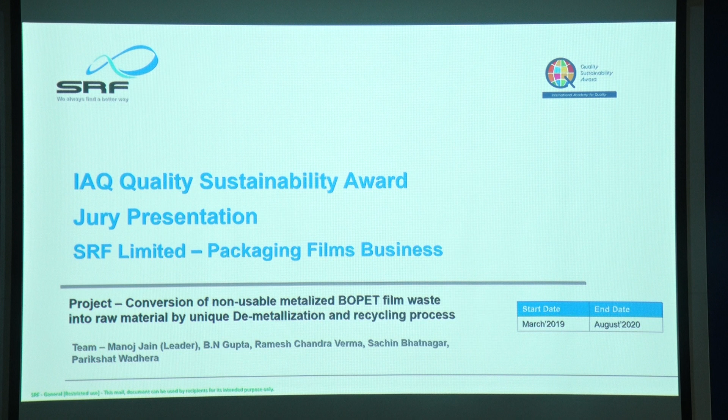Hello everyone, we are from SRF Limited, an Indian multinational having many businesses, and we are from the packaging films business of SRF. Our project is conversion of non-usable metallized polyester film waste into raw material by a unique demetallization and recycling process. My name is Manoj, and with me are my friends and colleagues BN, Sachin, Ramesh and Parikshat.

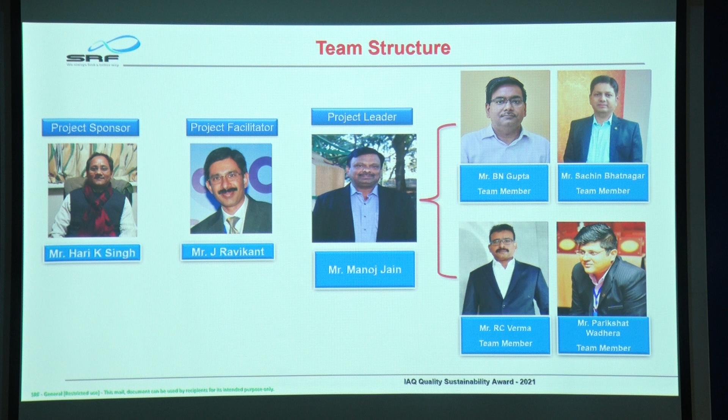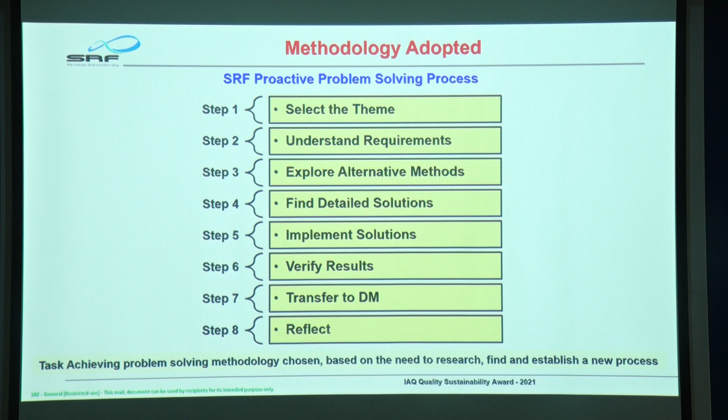So where is this need coming from? This need is coming from FMCGs or brand owners looking at sustainable partners, SRF wanting to be a responsible corporate supplier to them, and there was a global industry transition happening towards sustainability. There were foundations like the Ellen MacArthur Foundation, where a lot of brand owners took an oath of working towards sustainability within a given time frame, which led us to take a policy goal in 2019 about enhanced effort towards sustainability, under which 5 themes were identified.

While there were other teams who took up projects like single family structures, product portfolio shifting from packaging to industrial, we as a team thought of taking 3R as a challenge, under which we chose conversion of non-usable metallized polyester film waste into recyclable and reusable polymer.

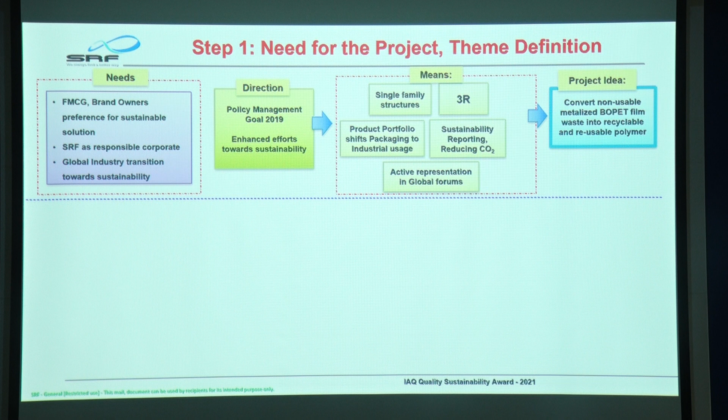So if you see the life cycle of the metallized film, we are producing 2 types of films. One is the transparent films or the bare films, which constitute about 76% of total production, and the waste of this particular stream goes back into the same process and is continuously being used. There is another stream which is metallized films, which corresponds to 24% of the total production.

Metallized films are used for improving the barrier properties of the food or non-food package, while the A grade goes to the customer. There's a 2.5% wastage generated during the process, corresponding to 535 tons per annum. This finds use in paper plate or rope manufacturing, and finally finds end of life cycle in the landfill.

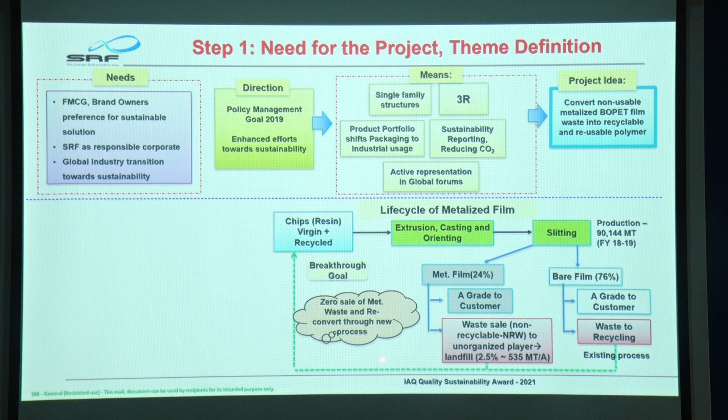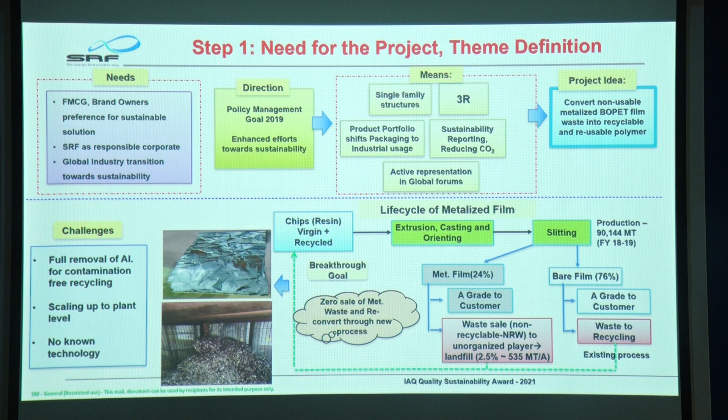So we thought that we want to eliminate the sale of this 535 tons of wastage. These are the 2 types of waste that we produce: one is in sheet form, the other is in trim form. The challenge in front of us was how do we achieve complete removal of aluminium from this film, and how do we scale it up, as there was no known technology available.

So what we wanted was a non-hazardous, easy to use process for complete demetallization of this metallized film waste. Fortunately, since we already had the transparent film waste with us, identifying target Q was not a challenge for us.

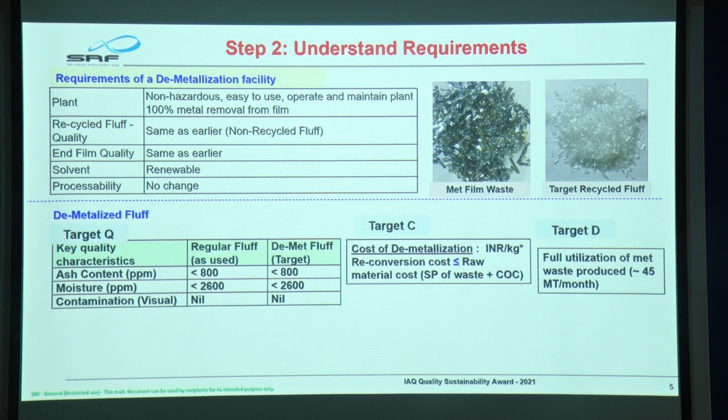So we identified target Q in terms of ash content, moisture and contamination, similar to the transparent fluff. Target C: we thought the cost of conversion should not make this fluff more costly than the raw material cost, so that is our target C. Target D: since 535 tons per annum corresponds to 45 tons per month, that is our target D.

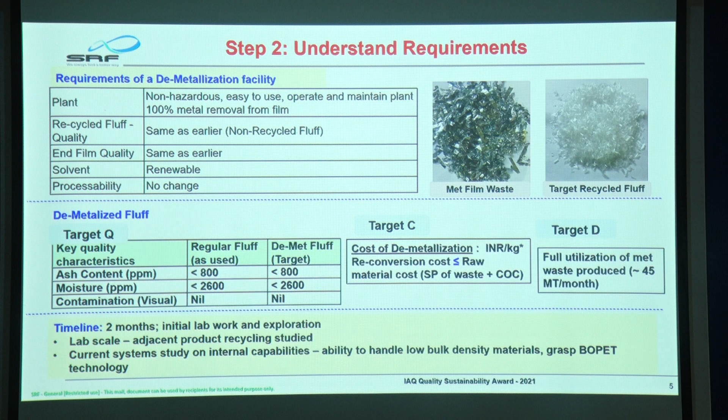With respect to timelines, since this was an exploratory type of project, it required lab work. Using adjacencies of BOPET film knowledge and internal capabilities, we wanted to understand how we could extrapolate this to handle low bulk density materials. So using PDPC, we took trials with various solvents in various concentrations at various temperatures, with agitation and without agitation, and finally ended up finding an alkaline solution which gave us complete demetallization.

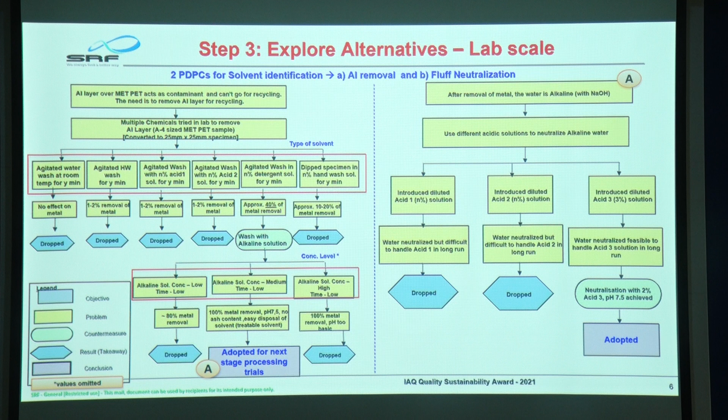The residual water was again a challenge for us to neutralize. So we extended this PDPC to find a best fit acid which could completely neutralize this residual water, to be used safer in the effluent treatment plant, and finally back into the process.

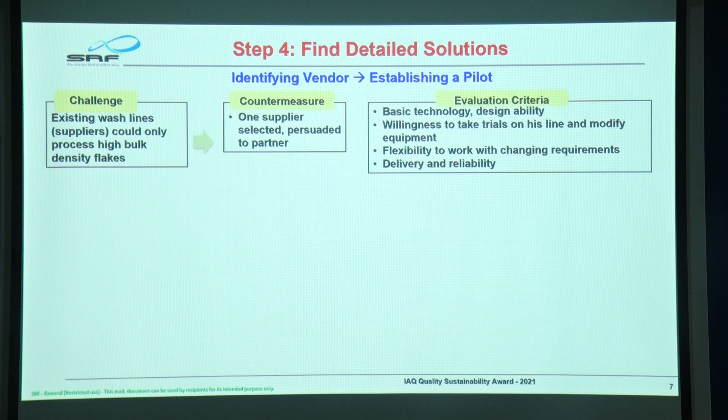The next big challenge in front of us was how do we scale it up. We know, by virtue of being in the polyester industry, that there are PET bottle crush wash lines available. So we chose 1 supplier based on our evaluation criteria and persuaded them to partner with us. One of them agreed to build a 10 kg per hour prototype for us, and we sent our waste to his site. We took trials as is, without any modification to the PET bottle crush wash line.

What we found was there were metal traces, meaning there was incomplete demetallization. The fluff was not moving forward as a continuous process, and there was very high moisture, which led us to do a design FMEA where we had to increase the surface area for complete demetallization. We needed to change the agitator and the conveyor for fluff forward movement, and we had to increase the dryer length to achieve moisture-free fluff.

Once this fluff was achieved, we brought it back to SRF, since the ultimate objective was to use it as raw material. We brought it back into the main extrusion line, injected it back, and took 4 sequential trials. While the processability was good in terms of film breaks, there was slight grayishness in the color which needed further redressal while we order this on a full-fledged basis.

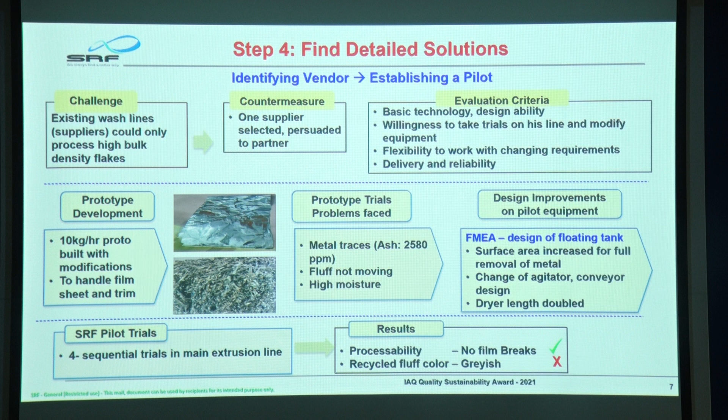We ordered this complete equipment from this particular vendor, which took about 6 to 8 months. Our job, meanwhile, was to find the best fit layout. We did many iterations.

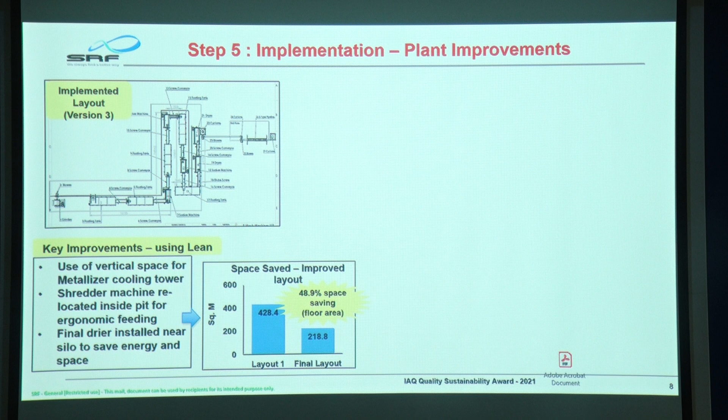We used vertical space by shifting some cooling towers vertically up, and the shredder needed to be located very close to where we were storing the waste. We finally ended up saving about 50% of the space that the vendor proposed to us.

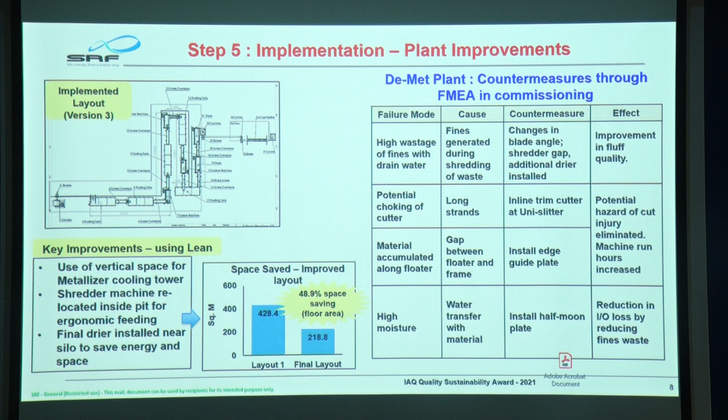When the equipment reached us, we carried out a process FMEA since we envisaged certain problems during the pilot scale. We envisaged high fines in the drain water, choking of the cutter, material accumulation along the floater, and high moisture. The countermeasures were identified and implemented, and we finally commissioned this plant in July 2020.

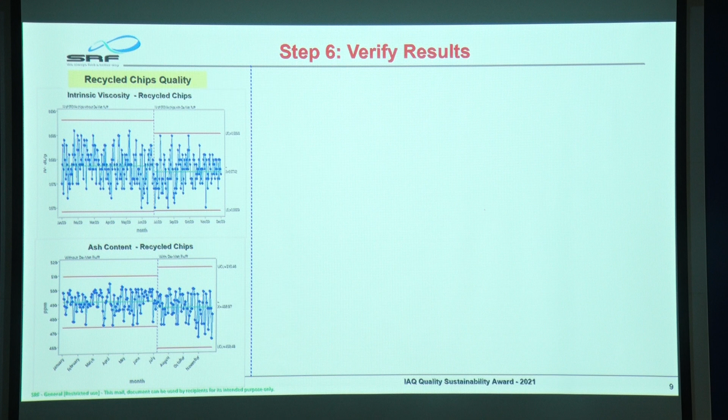Time for verification now. We verified both the recycled chips quality and the film quality. For recycled chips quality, the intrinsic viscosity is pretty stable, well within range, and also the ash content. Tensile strength is the most critical characteristic of the films.

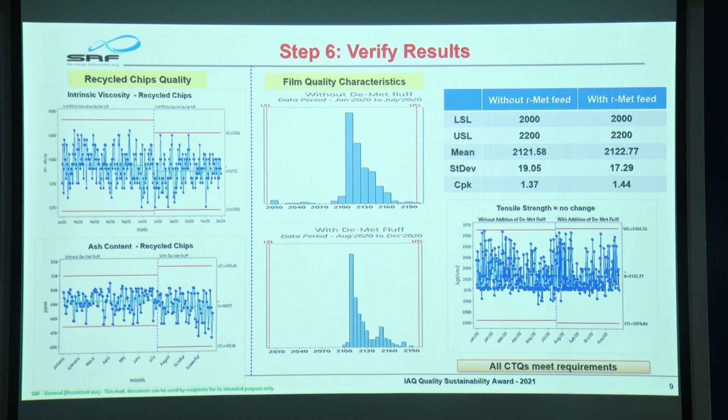We verified this. The process here again is very stable with a CPK of 1.44. So all CTQs are meeting the requirements.

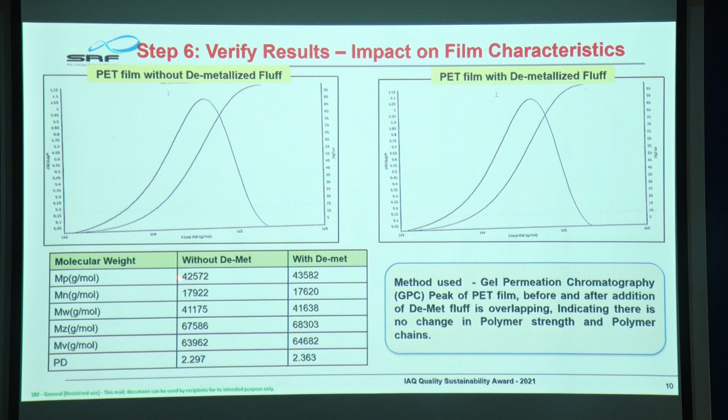We thought we must do a GPC analysis of this, so we checked the molecular weight before and after, which was found well within range. We sent this sample for food compliance certification outside. Before and after, the film was found food compliant.

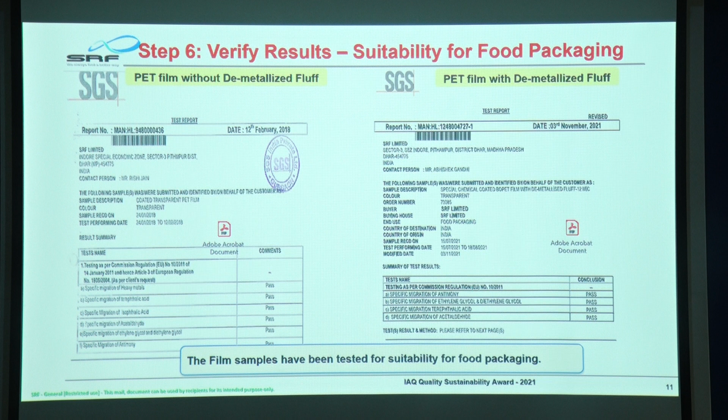Coming to verification of the larger goal, as we said initially that we don't want to sell this waste anymore, we are happy to share that from October 2020 onwards, we are not selling this waste outside, except for these 2-3 months of March and April where there was COVID and we had to shut down the plant for want of labor. We are happy that we have completely eliminated the sale of this non-recyclable waste.

Coming to the IO ratio improvement, we have been able to improve the IO ratio by 61.5% by virtue of recycling this waste back into the polymer stream, and in addition we have been able to save on the carbon footprint to the extent of about 920 tons per annum.

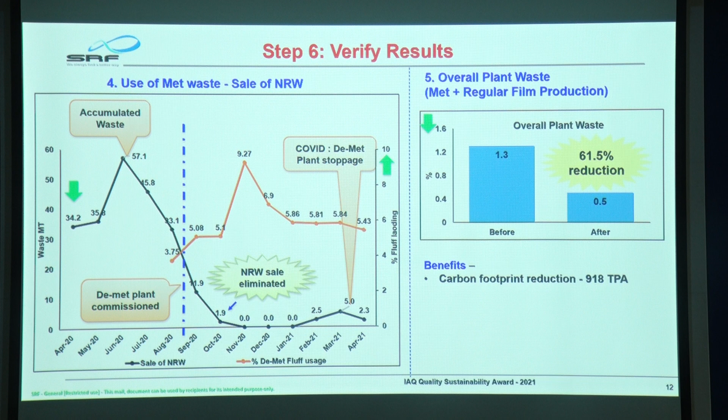This whole project included 63 different activities which we were able to complete more or less within the given time frame. This required 25 odd people at the project stage, and for routine operations we need about 10 people to run this plant.

This whole project cost about $330,000, and although we said that the cost should not be more than the raw material cost, we are very happy to share that this project has actually given us an ROI of 70%.

Since this was a new project, this required establishment of new standards, which we did, including SOPs, WIs, maintenance checklist, including the revision of the QCPC, since this whole fluff wanted re-injection into the main lines. So the mainline QCPC needed revision.

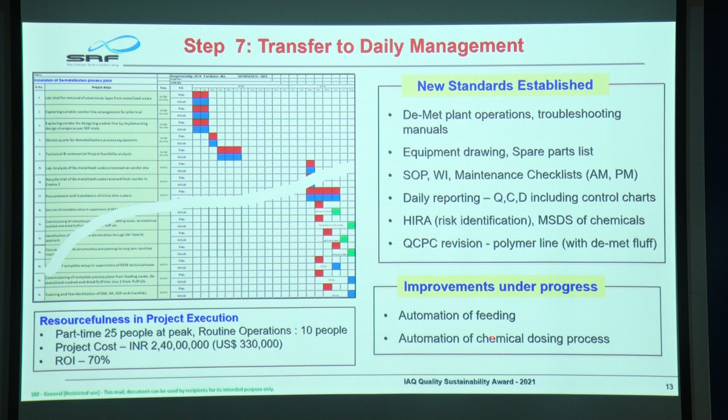There are some things still under process, like automation of feeding and chemical dosing, which we are doing.

Coming to the reflection, we feel that Goal 12 and Goal 9 are the best suited goals met during execution of this project. Goal 12, why? Because this is responsible consumption. As we said, we have actually been able to recycle 535 tons of waste back into the raw material stream. So that is responsible consumption for us.

Goal 9, industry innovation. This is quite an innovative project because no one has ever done it earlier. We are the first one to do this, and we are very happy to share that 2 of our competitors have already ordered this same line from the same vendor.

Since we have plants in Thailand, South Africa, and Hungary, there are horizontal deployment opportunities existing. We have already started executing this at the PFB Thailand plant, and going forward we'll be doing South Africa and Hungary. Whenever any customer or FMCG visits us, we proudly share our success story with them, and they feel proud that they are associated with SRF as a responsible and innovative partner.

We are happy that we have actually been able to improve or increase the end of life cycle of the polymer to support circular economy, which according to us is when a stream of waste goes back into the process for the same product - that is circular economy to us. We are happy that we have been able to achieve this, which has led to our capability development on our journey to sustainability.

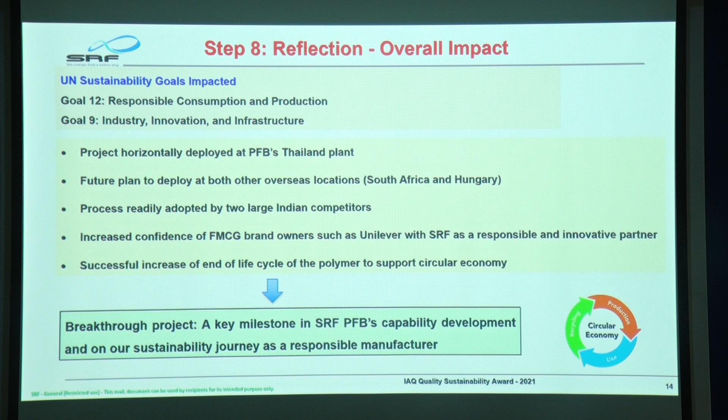This is a small video that we want to show you about how the process goes. This is the material feeding into the shredder.

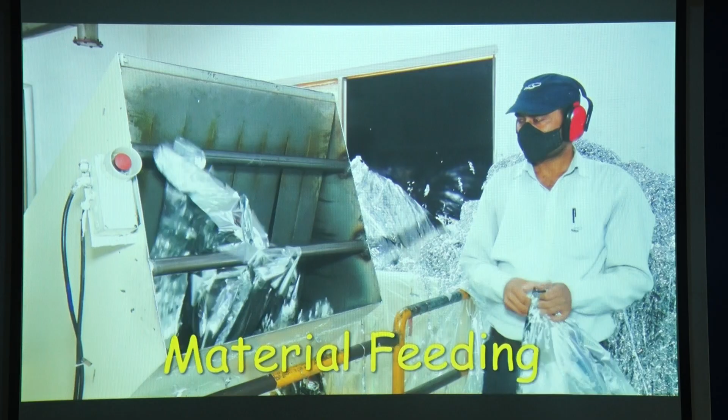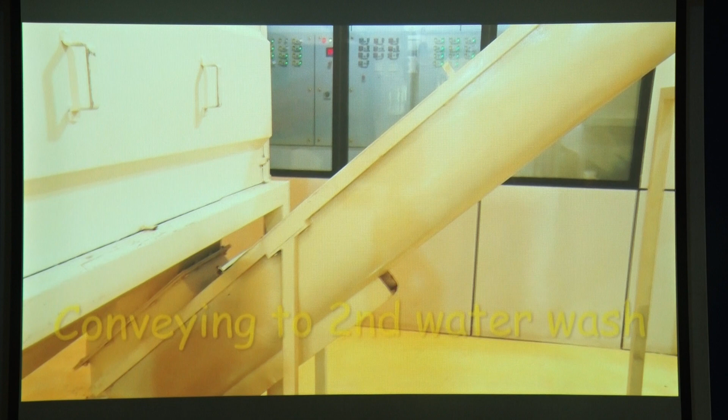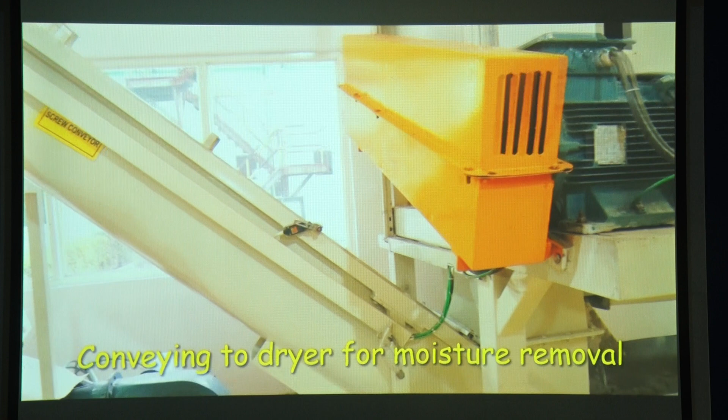The shredded waste goes into the alkaline solution for washing, and is finally transported to the acid wash tank for neutralization, conveying to the water wash to remove any residual acid. Second water wash, finally to the dryer for moisture removal, and conveying to the existing recycling system.